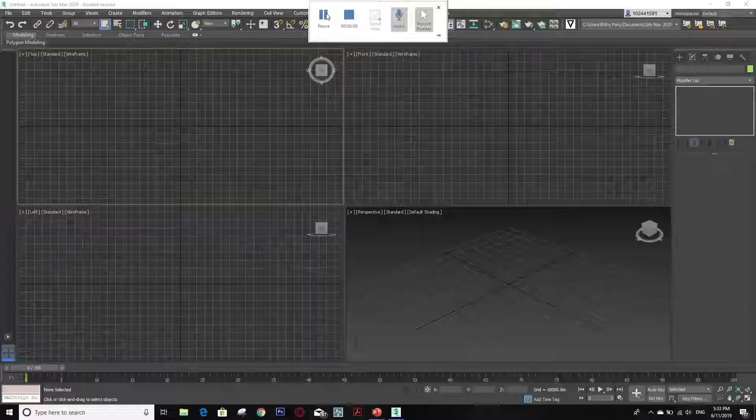This is my first video tutorial, and I'm going to teach you how to use Editable Poly.

First we go to shape, choose the box, and draw one box as a sample. This is how the box looks, and then you go to its parameters where you can set the length, width, and height that you want, and also add segments if you want more than one.

So I'll show you how the segment might look like. I'm going to set the height by 10. It's not showing up in the 3D perspective, but you can see it from the other views, like the left side and the front side. If you want to see it, just put Edged Faces, and the segments you added will show up like this. I'll just get back to 1.

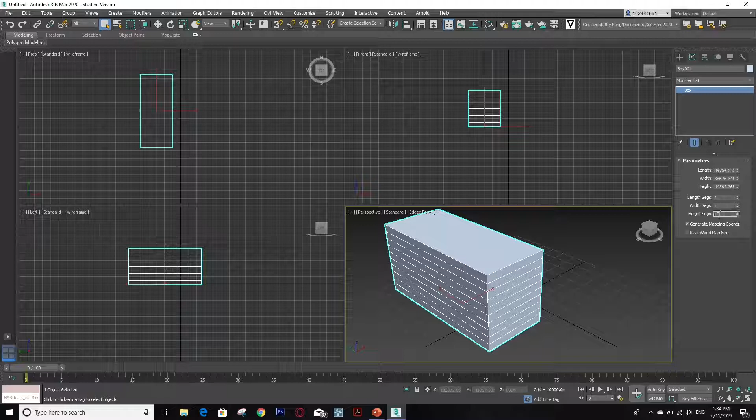Then you go to the modifier list and choose Edit Poly. In Edit Poly you can choose vertex, edges, border, polygons, or even elements that you want to work on.

For example, if you click on the vertex and then go to move, you click on that, and you'll be able to move the vertex as you want according to the axis. This is how the edges might work too, so you can move the edges.

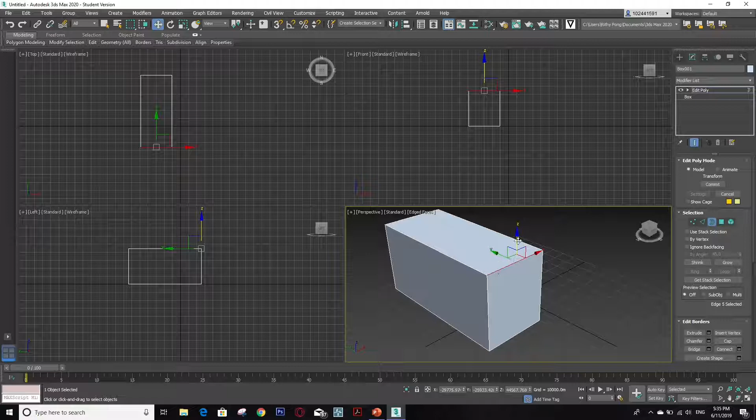And also the border, which is pretty similar. Then you can use the face, moving the whole face up and down or wherever you want. So this is how Edit Poly looks like.

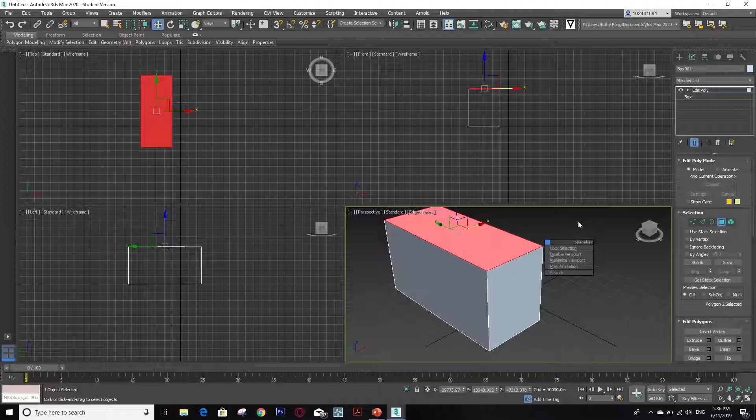You can edit any objects you've created earlier in the shape. Another shortcut, if you don't want to go into the modifier list, you can simply right-click on the box and click on Editable Poly.

Then the Editable Poly modifier will pop up, and you can do as I mentioned earlier, like moving the vertex and so on.

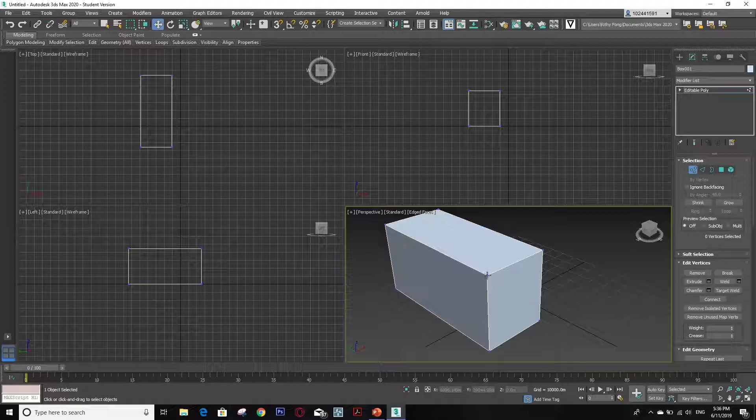One of my favorite modifiers is Twist. To begin, let's start with a simple box, and I'm going to make it a bit tall because it shows some good effects with the twist. After creating the box, go to Modify, then click on the modifier list and select Twist.

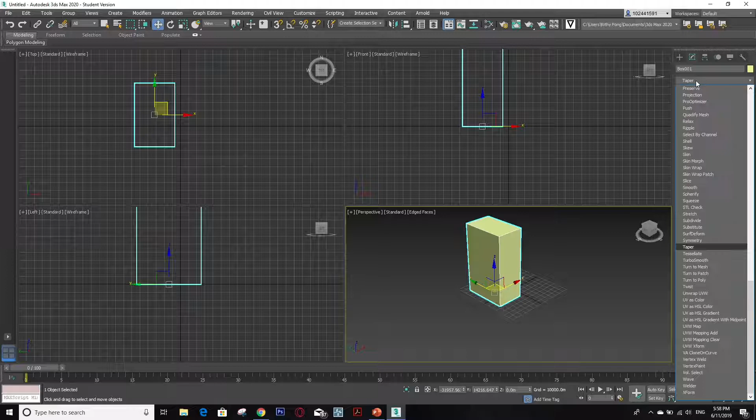Click on it, and in Twist there's a parameters chart with an angle and bias. With the angle you can adjust how it's twisting, like this. Bias lets you adjust the shape of the twist, how it looks from the top and bottom. Here it's difficult to see because we didn't add segments to the box.

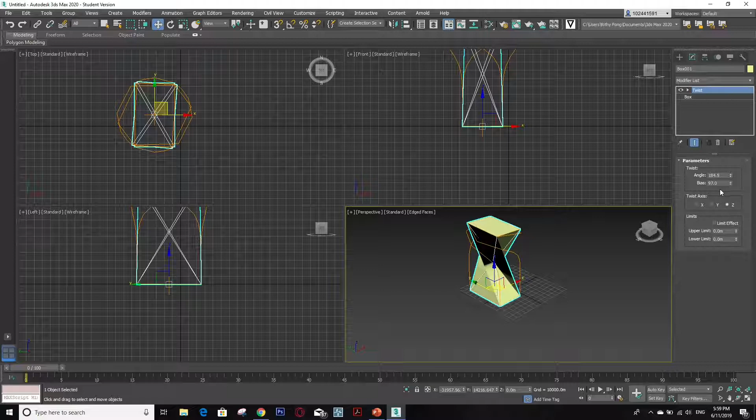So I'll show you another one with segments. Let's do the same with another box that's a bit taller, and add height segments, about 20 of them. Again, go to Modify, then modifier list, and Twist.

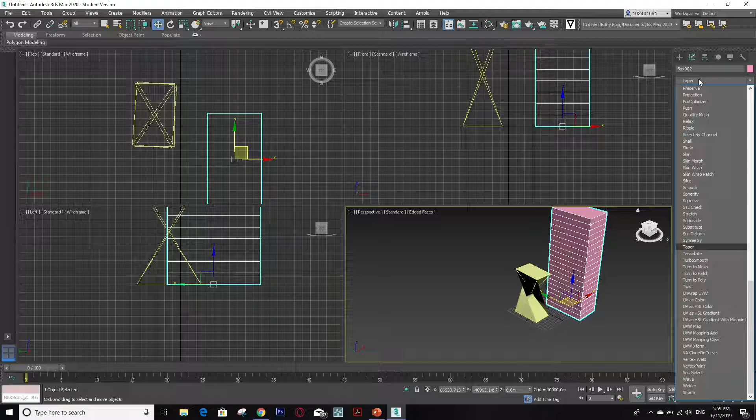Let's try with the angle, and you see that it's twisting. This is how we increase it, and when you adjust the bias, the shape also changes, like this.

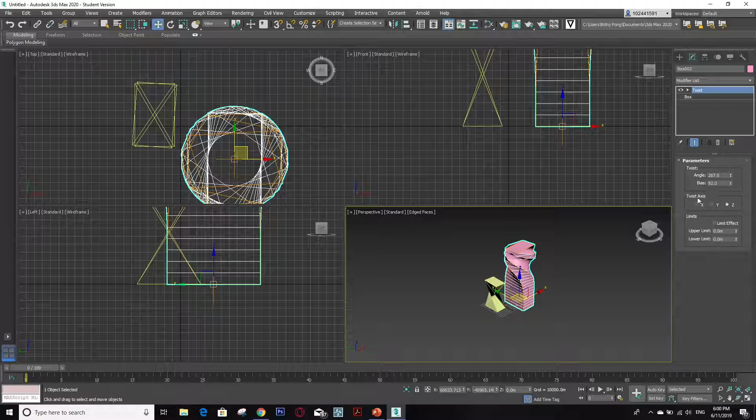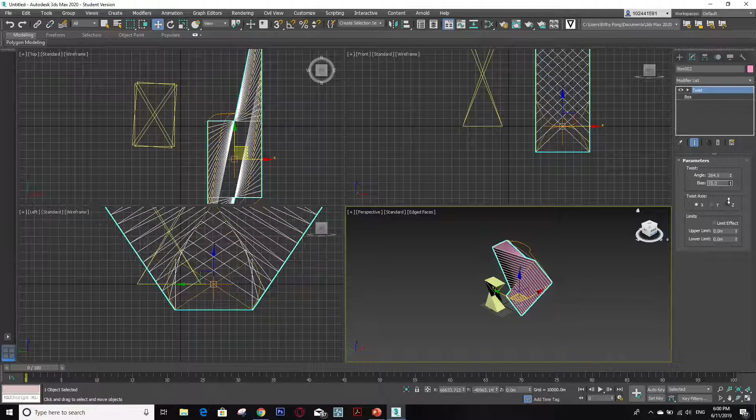There's another thing to know: the twist axis. You can adjust not only the Z axis but also the X axis, changing how it twists. You can play with different shapes of the building you create, but I just like this one. You can also adjust the limits.